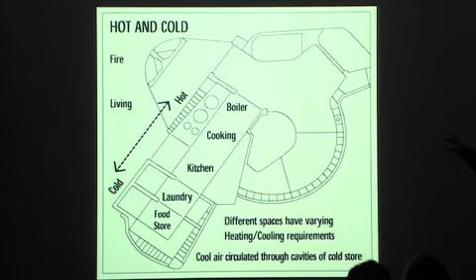Essentially we're having a fireplace - we believe that to be an important thing in the evocation of home. So the fireplace is at the core of it with the heating elements for cooking, and then as you get the colder elements, the food store - an old-fashioned larder, if you like - that's on the periphery. This structure would be a fiberglass diaphragm structure made of ribs, so it has lightness but strength. What you're not seeing here is the loo, the staircase, and the entrance.

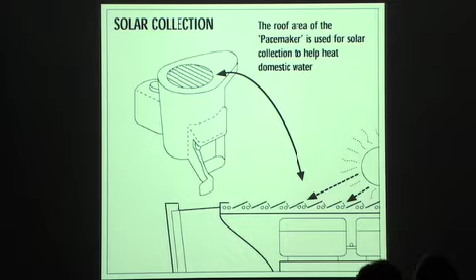This form derives a large area on its roof, which we can use for solar collection to preheat the domestic water supply. This sort of discussion is common parlance now.

This fiberglass element, whilst light and easy to transport, allows us to pour concrete into the wall diaphragms so that it begins to have mass.

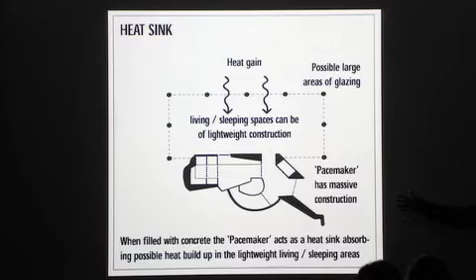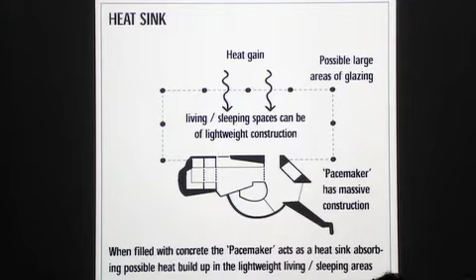The idea is that there are a series of ducts within this so that air can flow around it. If you build living accommodation next to it, the air can pass through so that at night time you close it off and have warm air contained within it. In winter and summer you can open these up, and then draw air through to cool the mass of this at night.

This image shows the relationship between the pacemaker, the clip-on heart, and the lightweight structure adjacent to it, which would have all of the living accommodation. That might be a panelized construction system.

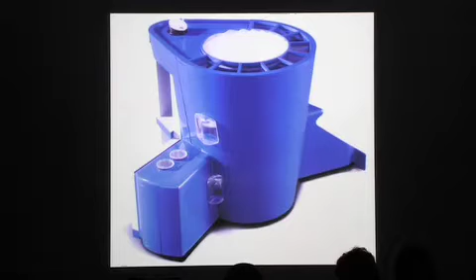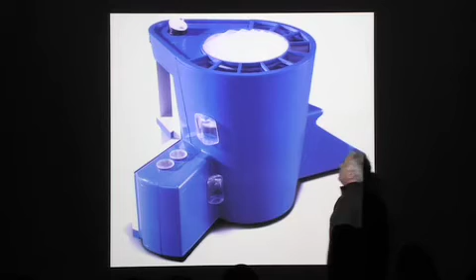So there is the pacemaker. This is the entry point here, and this is the connection to the services. This is the kitchen element here. The second story has got a bathroom within it, and the fireplace element at the back, and a satellite dish on top.

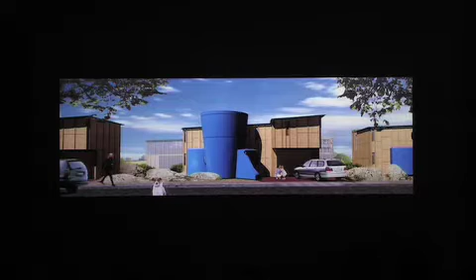So here you see it ready to roll up to site, with the pacemaker on top and the flat panels below. We did a competition called Concept House, and we shamelessly re-employed the pacemaker but designed the flat pack system for the space for the house next to it. So there you see the front elevation, and here the somewhat idealized garden elevation.

The next project I'm showing you is one we did for a Europan competition in Switzerland, in a place called Biasca Pollegio. It sits at the very base of the Alps, at the confluence of two valleys.

A railway tunnel was going to be built to speed up rail traffic from Germany to Italy, boring through that mountain. They were going to need a village created for 800 workers while it was being tunneled. Then the idea was that as the railway line moved south towards Italy, the workers would move with it, and the buildings themselves could move with it.

We were intrigued by that as a project, so we proposed a series of chalets in flat pack construction, but in a way this is the inverse of the pacemaker. Rather than the heart of this chalet building, which would house 20 workers, being a prefabricated element, we were thinking it would be a stone element housing the kitchen and hearth as the communal area for the people living in that hut.

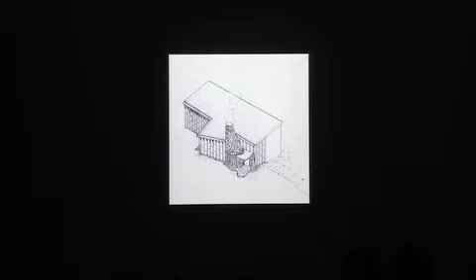We wanted something not transient for that, because these guys are going to be poorly paid, coming from all over Europe, and so we wanted something with a kind of solidity and warmth for these people. But then we thought the chalet itself would be of prefabricated flat pack construction.

So here you see the stone chimney, entrance and kitchen element, and here the flat pack element that makes up the chalet. Here's the decking, this is the communal room. We have two-story shower elements with 4 showers in each, which would be made and craned in.

And here you see the floor plates and the wall slabs, and all of the external wall panels, and then again the prefabricated roof.

Your clicker. Oh, right, you can just go forward. Thank you. Okay, thank you very much. It's radio control. Thank you.

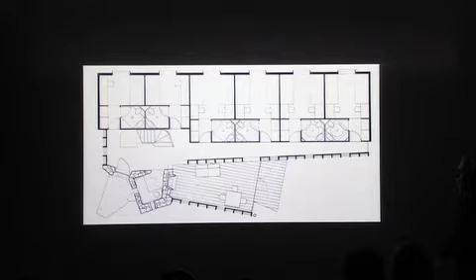And here you see it planned, obviously very, very small. This is the communal room, there's the little kitchen, and here the shower units and the bed spaces.

And here a section where you see the shower element, the prefabricated shower element, and there obviously the stone hearth for the chimney. Here the elevation.

This was our site plan. This is the railway, which is being connected to and enlarged, and these were the prescribed sites.

The idea was that you had to house 200 workers, then 400, then 600, then 800. This was an old empty convent that would provide some of the facilities they required, and this would all be the residences.

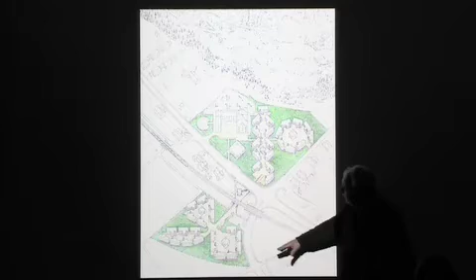So the first 200 are contained here, the next 200 here, and then the next 200 like that, and finally the 800 dwellings. But we gathered them together in clusters so that there would be a communal space for all of the people staying there.

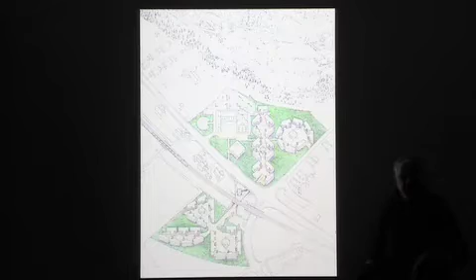This was another community building, that would be a dining hall. But these were kind of smaller community buildings which would have table tennis tables and billiard tables and so on.

So here you see a section through that communal space, and in the communal space, the green, we call these little hamlets, where you can see they're playing boule, and the glorious Alps as a backdrop.

Needless to say, that didn't win the competition.

So now we're going to do a leap forward in time to much more nearer the current day, for a very slow-moving construction for a private house, in fact for myself and my partner, in Highgate in London. We did wonder whether we should call it Sloth House, but we like Stealth House.

And so you have the kind of residue of this little community, this little village, left by all of these stone towers, so that there's some kind of, to use the very popular word that the Conservative Party seemed to love, legacy. There was a legacy of this development.

So I'm sorry I didn't mention that, but I suppose we kind of like the notion that some things can be very, very permanent and some things can be very transient.

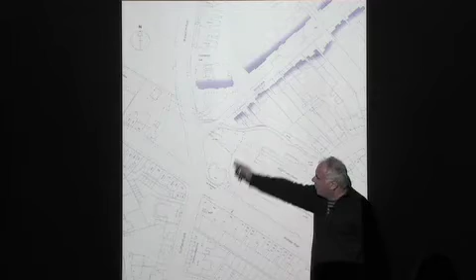So back to Stealth House. Stealth House is located here, and it's importantly near the Woodman pub in Highgate, and it's in Wood Lane.

And Wood Lane is an interesting street. It leads to Queen's Wood, and it has on its south side, which this is the south side, a whole series of very idiosyncratic buildings.

The land not only slopes quite steeply down the hill to this wood, but it also slopes very steeply down in this direction. In fact, it slopes down to the tube, to one of the entrances to the tube station. So you've got a very interesting cross-section on the site.

And we bought this little strip of land between these two buildings and proposed a house there. And because the land, as you see, this is the road here, and the land slopes away quite steeply, it gives us the opportunity to consider a house where we can put the living levels at high level.

So that we're getting the advantage of the fantastic views, or being in the tree canopy. You get the views in winter. In summer, you're in the tree canopy, and that's quite extraordinary. As well as the sunlight.

And bedrooms, of course, don't really need a whole lot of light, and nor do bathrooms, so those we suppress and we sink into the earth.

In looking at the plan form, south is down here, the sun is moving around like this. So we thought of the merits of having a rounded end on the south side, so that as the sun passes around it, it allows light to come smoothly into the neighbours' houses.

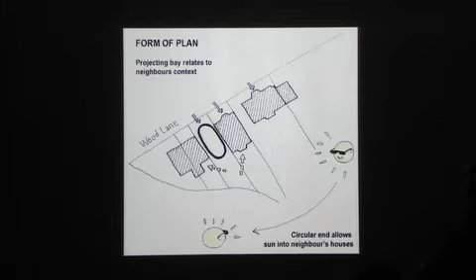On the road side, there are a series of bay windows here, and we make the argument that we're responding to the context by having this house expressed as a bay.

So we've pushed back the facade of our building at that point here, and then we've decided to claw back the space we've lost by pushing out the living space above over the cars.

In thinking about the materiality and form, the lower levels are going to have the bedrooms. Bedrooms quite conveniently can have a rectangular form, because the largest object is about 2 meters by 2 meters, and they're pretty well nearly always square or rectangular. So for that reason, we've got a kind of very orthogonal form to the base. It sits comfortably with the neighbours.

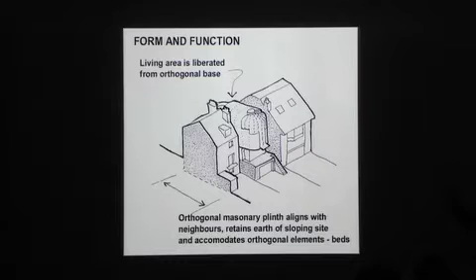In terms of materiality, it's been cut into the hillside, so we want a dense material that will retain the earth. So in this case, we're proposing engineering brick.

But we're saying that the living area up above is liberated from that, it can take its own form. And we're also saying that for economic reasons, one understands why we make this out of brick here—we have to have something dense to hold back the earth.

But above, while we're not holding back the earth, maybe we can then look at a prefabricated construction. So we're proposing that the living area is built entirely off-site and brought in. And in that way, we're arguing that it will create less disturbance for the neighbours and a higher quality of construction.

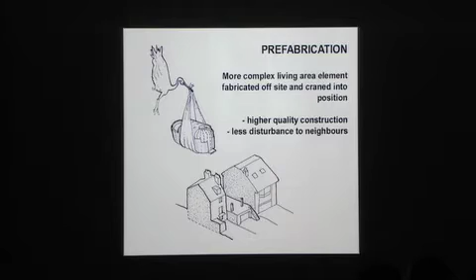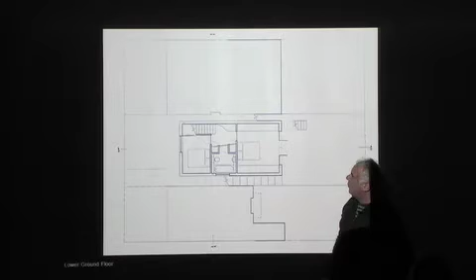This is going down the stairs from the entrance hall, and there's a guest bedroom there and a principal bedroom here, which has access onto the garden.

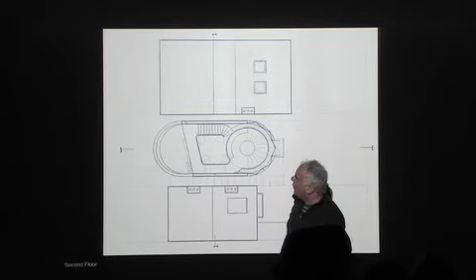And you arrive here, where there's a gallery overlooking this double-height space, and there's an external terrace, and that's located there because it gets the setting sun.

South is down here, so the sun is setting over here, and this gets sunlight from about 3 o'clock.

And then here you go up a ramp to a kind of, I'm calling it an elevated conservatory. It will be a conservatory in the sky, really, which will have planters and seating there.

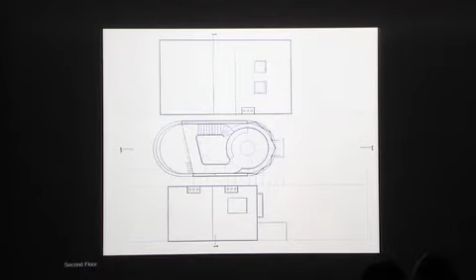And obviously, the house is really seen as a kind of promenade through a series of spaces, and that is the conclusion to this promenade through the house.

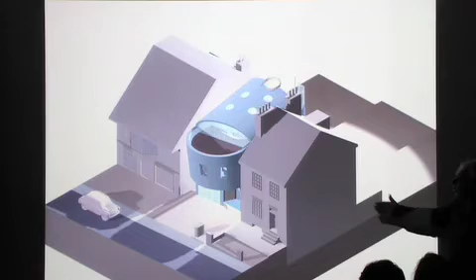So here you see a computer model of it. This wall is cut at an angle here, like this, so that you're getting more of the space available to the sunshine.

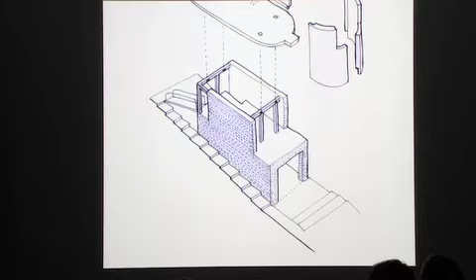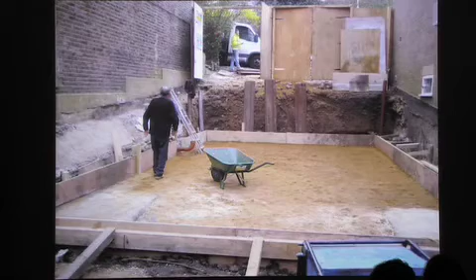And there you see us digging the hole in the ground, and a rough cast slab there, and then sand on top of that, and then I think it's 6 inches of insulation to isolate the building from the cold earth. There we are, pouring the slab.

And then building up the engineering brick off the slab. We're using engineering brick because these are incredibly strong bricks, they're incredibly moisture proof, that's why you see them on a lot of the railway bridges.

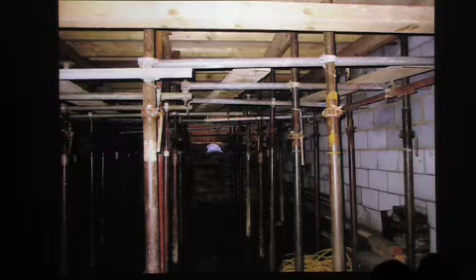And we're doing cavity construction, and where it's below ground, we infill that cavity with cement, so it becomes a rigid wall. And above, when it's above ground level, then we put insulation in that space. When it's below ground, we put the insulation outside, but of course it's covered by the earth.

So this was all the propping for the first floor slab, or the entry-level slab. There, a bit of shuttering on the side. There you see the insulation between the inner course and the outer course.

And as soon as it's above ground, we can then switch to this lightweight concrete block. So there you see it emerging.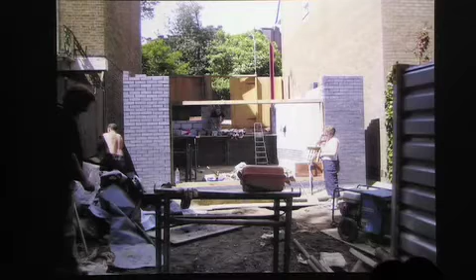There you see the client in one of her happier moments. I don't know, you probably see her scowling a bit later on.

This is the entry hall slab, and this is where the stair will go down.

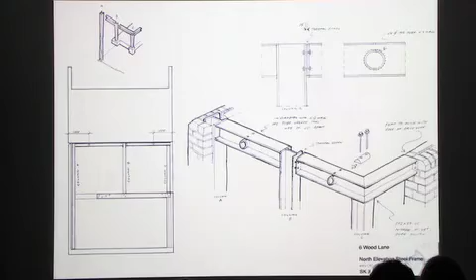And these are sketches of steel trestles. That's the entry hall slab here, and there's steel trestles on top of that going to support the living element that's going to arrive above, and it also braces the walls so that they're stabilized in this fashion. And this is making them, and this is installing them.

And that's on the garden side. So there you go, we're ready for the top element.

What I did was, I went to the pub and I was having a pint and I was introduced to a guy, and now I'm embarrassed because I've forgotten his name. Tony, it will come back to me. He's an amazing guy, and he is a product designer, but he was a product designer for people like Norman Foster about 30 years ago.

And I said, 'Would you be interested in making this top bit?' And he said, 'I might have in my youth, I'm not sure, I'm going to come and have a look, show me the model.' And so I showed him my model, which is not this one here, by the way.

And he said, 'Well, if you're making 200 of these, I could see why you might make it in aluminium, that you might set up all the tooling, but you're only making one of them. So in that case, why don't you just make the one of them?'

He said, 'You've made this model by making ribs and then bending over bits of plastic, why don't you do that with this? And why don't you make it out of timber? Then you can epoxy cover the timber and it will be waterproof.' So we thought that was very, very clever and very helpful. And so we looked at how we might break the top element into components that could be made out of timber.

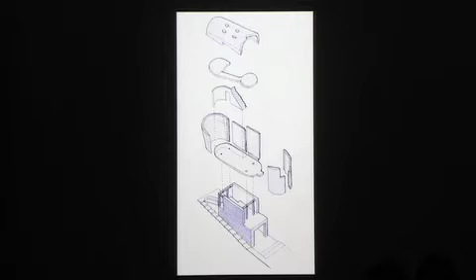And this is a drawing by the people who we got to make it. They're called Cowley Timberwork, and they do absolutely extraordinary work with timber. And here are their drawings of how it might all be panelised.

Essentially it's made around, in old money, a 4-foot by 8-foot sheet of timber, which in metric is a 1200 by 2.4 metre sheet of timber. And so for economic reasons, each of these panels is broken into the sizes of a sheet of timber. And there are 4 ribs to each of those sheets. And all of the curves here are just 2-dimensional curves.

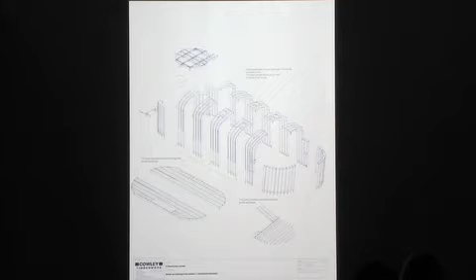I kind of go a bit berserk about the way people love Zaha Hadid, because she doesn't have to operate in any kind of real world at all. And her curves are very, very complex, and that is very expensive to make her projects. So I think it's more interesting to think about how you can still achieve extraordinary things, but do it with an intelligent economic approach.

Unfortunately, I had all of my slides of the construction of this stolen, or rather I had my laptop stolen. They were all on this. So unfortunately, I don't have the best photos of any of this.

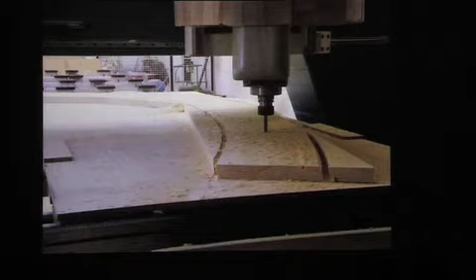But those planks that you saw there then were jointed into what we called hockey sticks. So they had this kind of profile. And there you're seeing a joint in the hockey stick there and a joint there. So those were flat bits that were then jointed.

And then they were cut away by this CNC router. So this is all digitally analysed and then cut by a kind of computerized drill system or cutting system.

And even though I say it's a 2-dimensional curve, it has huge complexity, because when the walls are purely vertical and the plywood then is at a right angle to that, but as it goes over the barrel vault, the angle always changes if you're trying to get the plywood fixing directly onto the timber ribs. So they're exceptionally clever people, and they've worked all this out.

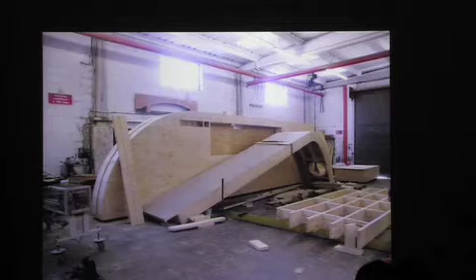There, another detail of the plywood being lapped over and screwed onto the ribs. Here you see one of the lanterns set inside. There you see one of the bay ends, and that will be the terrace up there.

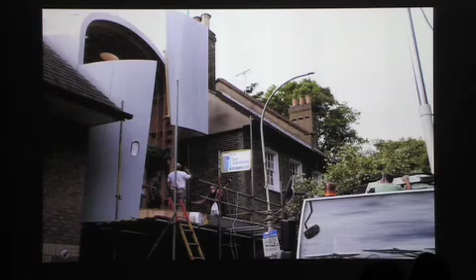And then this is on the roadside, where you see the panels turning over to create the arch, and the quadrant panels coming in to create the bay window area. And this is the terrace deck.

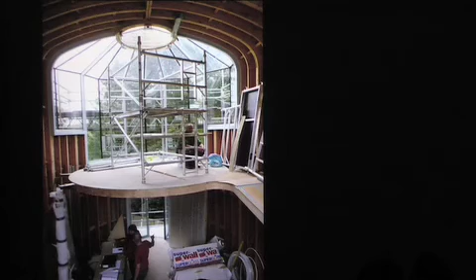So having got glazed, this is a view of the interior. That's that circular disc of space here. And then this is looking back towards the street. All of this was prefabricated, all of this. These stairs came as a prefabricated element. It's all made up in Lincoln, in the north of England.

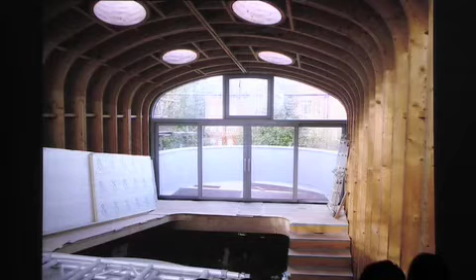And then that is the terrace. Another view—you can see there was a fair bit of water penetration before the glazing was complete. And now beginning to line it out.

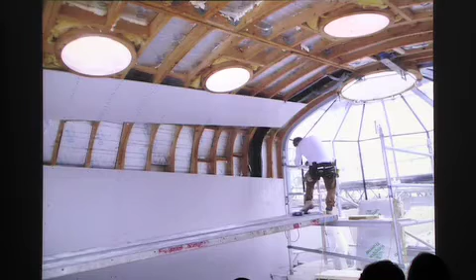Although it kind of looked like quite an interesting structure with all the timber, we just thought it would be more interesting to insulate. We had to insulate between all the ribs, and then line it out with plaster. So here you're seeing it lined out. Those are apertures in which they're going to...

It's bendy plasterboard, yeah, only about 5 mil thick, and so it has this funny sheen on it. It's a different colour.

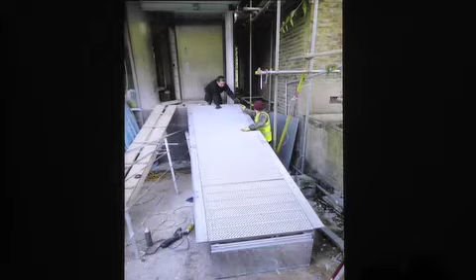And originally we had a ramp going into the entrance, but then we changed it to a bridge. So here you see the bridge coming in.

So now I'm going to take you up relatively to the current day where it's at. It's not a completed building, but that is the footbridge approach, and the doors on the left there.

And when you come in, that's where the wardrobe is. And this is where the letterbox is, so if I go... yeah, so there you see the letterbox there, and it...

And it discharges into here. You can see we also keep our nuclear waste there.

So that's the wardrobe there, and then you get a door here which goes through to the office. And this is the office with a slate floor that will shortly carry on all the way out to the end of the terrace.

And then this is the stair down to the bedroom level. And there you're seeing the guest bedroom. So you can see this is the ground outside, it's at a higher level.

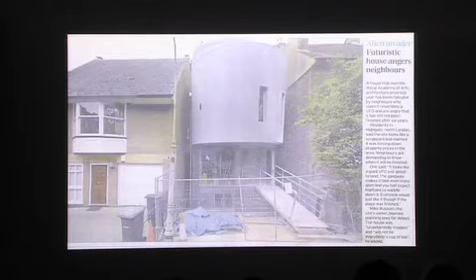So I'm now going to talk about Downley House. And this is the last project.

Downley House sits in a little dale in the South Downs, and it is actually quite beautiful. Although when we went there the first day, Andrew and I couldn't believe that anybody would want to live there.

Oh, now that's interesting. Well, it's not interesting, it's not very helpful at all. This is a page where this must be a blip with this USB stick, because the image is gone, you're only seeing bits of it. Is there any way we can get these images back, do you think? Or could I switch to my laptop? Would that be all right? Sorry about this, guys, I'm going to get my laptop out, because these are quite important sketches. I'll carry on talking while I'm doing this.

I've got a white cable, which hopefully will do something. No, that's HDMI, that's all I've got. If you can continue your slides, I can bring a VGA adapter. Is it worth 5 minutes? I can just grab an adapter. Mac adapter. Then we're back to the laptop. Sorry, yeah, can we get this? I can bring that up. No, it's not a problem. Yeah, can we do that? Because I just... Yeah, I got it, but downstairs the big one. Give me 5 minutes.

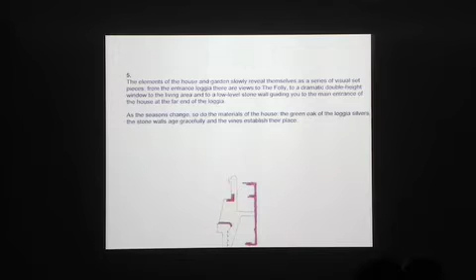Couple of minutes, his office is downstairs. It's... could be what? I don't know. It's weird, isn't it? There you are, you can see that's the image that I want there. The trouble is, it's actually quite important to the description. It's this image here.

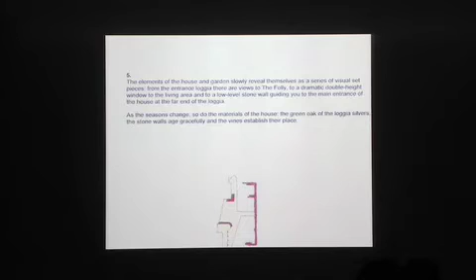Yeah, you're missing like most of it. This is the story, this is how we, why we do what we're doing. Then why would that do that on the... I've had this kind of thing before, I don't know. I'm sorry about this. It's alright, it'll be better. I can't even really blag it. Well, I could blag it, but it'd talk about the bit that's below.

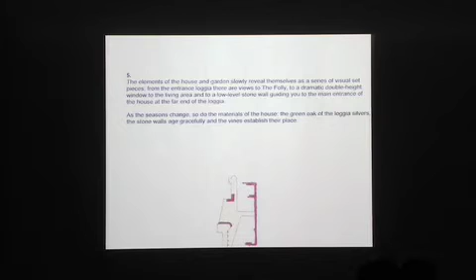Yeah, actually what I'll do is use this. I'm sorry, guys, while we're getting this sorted out, because I have got the images I want on my laptop, but I can use this image to talk about the brief the client had.

They're a young couple, I'd say mid-30s. He's obviously made a fair bit of money, and his wife is American, and she's an illustrator. They met when he was in New York and worked in a wine shop, and she worked in that wine shop - that's how they met. He's really into wine, serious wine, drinking it and trading in it. But he actually made his money doing what are called PFI, Private Finance Initiative - student hostels, hospitals and things.

He wanted to move out of London. He found this bit of land that he thought was very beautiful. And his brief was very contradictory. He would say: I love my children, they're wonderful, I like to supervise them, I want to be away from them. My wife has a wonderful family, I love it when they come over, we have a wonderful time together, I want to be apart from them. So he set up, in a way, a lot of things he wanted as contradictions. And then they did drawings where they would say, we don't want that, we want that. We don't want this, we want this. So it was a kind of very rich and poetic brief.

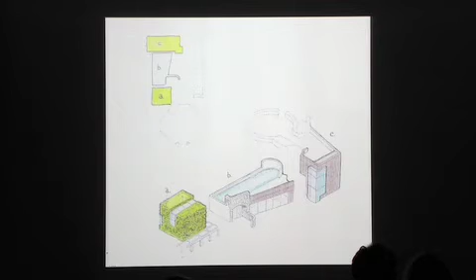How are we doing? Do we think we're... Laptop. Yeah, that's it, thank you very much. That's the image I want. Is there a reason why it's sunk? Are you going to full view? Full view. No. Okay, yeah, okay, can I use the clicky or do I have to use this? I don't know if that works on Mac.

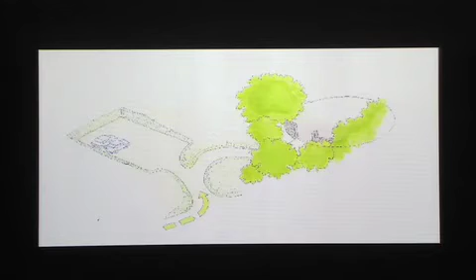So this was the notion of arrival. Edwin Lutyens' work is very much to do with how you arrive somewhere, and then how you experience beyond - it becomes a promenade through the house and into the great estate.

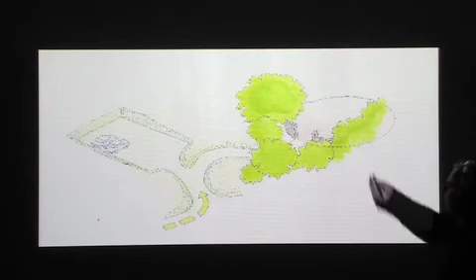This is the location where the site huts were for the guy who died. We're accepting that and keeping it, saying that's guest parking. But then we introduce this looping drive that arrives in a stone forecourt. This is the point where you leave the countryside and leave the world of the car behind. The owner's cars are set into a garage through this wall, but it's buried under the hillside, and that becomes a loggia element that takes you towards the house.

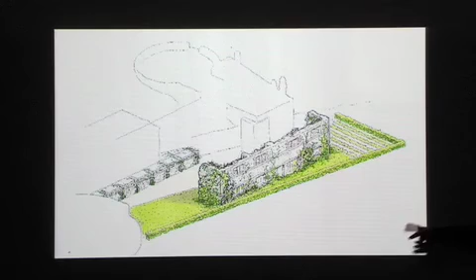It takes you into another courtyard, framed by this ruined wall. That ruined wall works as a romantic folly, but it also screens the new house from the neighbouring houses, making it a very private place, while also affording the neighbours privacy as well. Here you see the ruined wall from the other side - we're proposing to just plant it, and it had a cellar area that we proposed would have pools for carp in it.

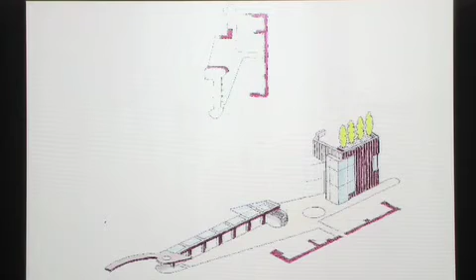Then I spoke about the three elements of the house. This was the loggia, and on axis with it we have something that begins to reflect the living element of the house - the living room might be here beyond, but you don't go directly there. You sweep into the house at this point here, and that is the point of entry.

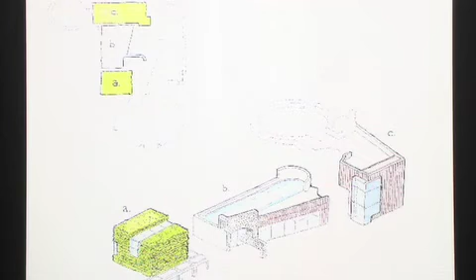That is the wing for the guests and his office, and this is the family wing here, with the living area and swimming pool above. So there you see the swimming pool, but the swimming pool begins to signal the route through the house into the landscape because it's set into a hillside.

This would be a kind of barbecue terrace here with the views to the valley that he really enjoys. Because he's bought this large piece of land, we wanted to extend across a wildflower meadow to the very end of the site, and there we proposed a tree house for the children.

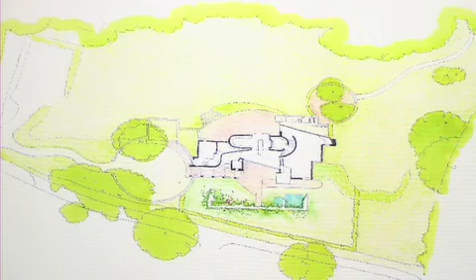So those were the drawings with which we got the gig. And these were the next series. We didn't plan it at all - we didn't say this is where the bathrooms are, this is where the bedrooms are. We didn't do anything. So they came back and said, well, we're very interested, but can you just show us where the bedrooms are and where the entrance is and stuff like that. So this was a very quick drawing to show the layout.

And this was a very quick development in three-dimensional terms, where you see the wing here and the open-air swimming pool.

We carried on developing this for a few months, and we got to the stage where they started getting worried about having a swimming pool, an open-air swimming pool, which would ice up in the winter and leaves would fall in it. So we thought about enclosing the swimming pool, but we were very drawn to the idea of it being an open-air swimming pool. So we had this kind of concertina glass roof that would go over it.

And then we got into the design of that a bit more, and then they began to realize that we were sinking a lot of money into this, and they began to feel that it was a bit like having a child, or a pet, that they could never go on holiday because they'd always be worrying about this swimming pool. And so they said, regrettably, as much as they loved the swimming pool, as much as it helped us get the gig, that they would have to dispense with the swimming pool.

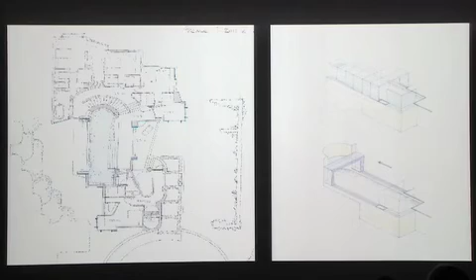And so we had to think about what we could do without a swimming pool. And I'd like to thank Will for the wine tonight.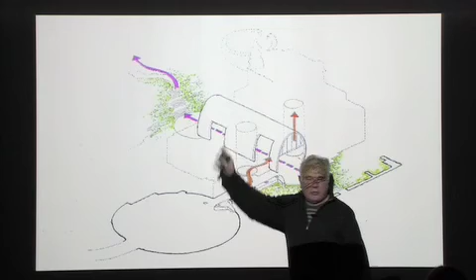And because of their passion for wine, we adopted this as the unifying element in the house. So instead of having a swimming pool, we introduced a great big wine barrel as the heart of the house, connecting from the entrance of the old house all the way through the house up into the landscape. On each side of this wine barrel, we then have two more cylinders, one of which is the route that takes you up to the upper terrace, from which you also get access into the garden.

So this was a developed plan showing that there's this space that carves all the way through the house, from the old entry point, and carries on up into the landscape.

This was the living room, this was their cinema room, that's the kids' playroom, that's the wine cellar, that's the kitchen. There's the garage set into the hillside, here the loggia, the entry point here. At this level, that's a kind of boot room, there's a kind of service entrance there, boot room and utility rooms, and that's the kitchen.

So luckily, they stuck with us and went for the wine barrel. So here you see a development of it, the wine barrel, the loggia, the route up to the very roof of the house, where you get that stunning view.

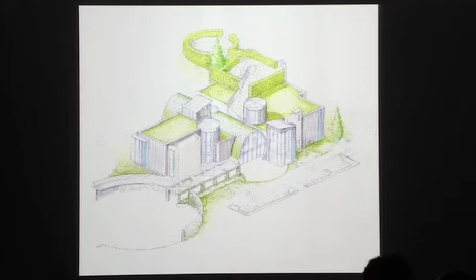And these were the planning drawings. I didn't really go into the planning scenario on Wood Lane, which was on Stealth House, but here we had a much easier planning route, though it wasn't without a level of interest for us.

As I say, we were attached to this competition, and what we did with our scheme was we said, well, we'll keep the ruin, but we won't build off the ruin. We'll use it as a screen for the new house and create this inner courtyard. I think the other architects either built off the ruin or knocked it down entirely and probably put a white sugar cube in the middle of the green field.

What was funny, when we were in the planning process on this, we had to go before the South Downs Design Review Committee, and the planners asked for their advice on this design. They said they could not understand the scheme at all, and in their view, you should either build off the ruin or knock it down and build a new house.

And what was interesting was that I spend most of my time moaning about planners, saying that they're just all peasants. But in this instance, the planning officer rejected the advice of the Design Review Committee and of the South Downs, and they gave planning consent for this.

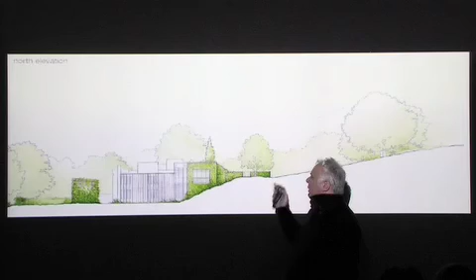So here, this is where it's cut into the hillside. Here you see the family wing with the sitting area here, the cinema room here, the kids' bedrooms, and then this is the master bedroom suite. And that's the roof terrace there where you get the view, and here stairs down back into the landscape.

So perhaps back to the technical issues, which are the real responsibility of this lecture. How is this house made?

What you're seeing there is a block of CLT, cross-laminated timber, conceived I think in Austria, where they have a huge surplus of wood and didn't know what to do with it. Some bright person said, why don't we turn it into giant plywood sheets? So it became a store of building material. These samples are about an inch thick, 25 millimeters, and this one is about 5 inches thick, 125 millimeters. But it might come in a panel that's 6 meters long and 3 meters high.

We thought this would be a very good way to build this building quickly. I should say the client built it himself—not physically, but he managed the construction. He took a year and a half off work to manage the construction of this building on site.

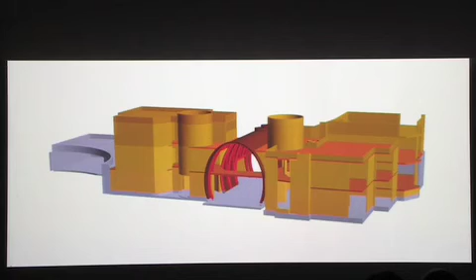They undertook to deliver the wood, which would be cut in Austria, shipped to Switzerland, and fabricated into these panels there. It would be delivered in 3 elements over a 6-week span. There were quite a lot of lorries, but they came every 2 weeks—delivering for this section, then that section, then this one.

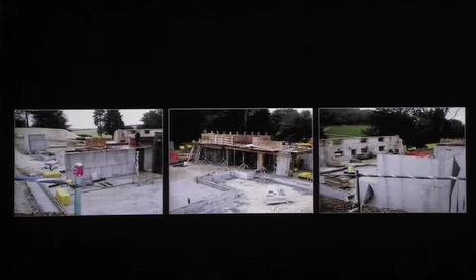I mentioned that the site was chalk. The first thing the client did was raise the site entirely. Here you can see where it's cut into the hillside, and they've built these concrete retaining walls. They're using concrete anyway for the floor slab, so they just turned it up the side to retain against the earth in these locations, and there, where the underground garage will be.

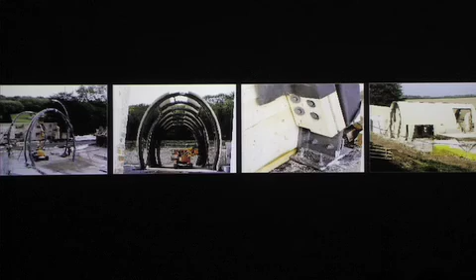This is the arrival of the foudre, the barrel vaulted space. You can see it arriving as these ribs here, which have a kind of knuckle joint up there, confirming it's on the axis of the old ruin. This is a joint where it meets the ground—they're just bolted together like Meccano.

This is effectively the dining hall of the house. I could probably get Wood Lane inside it—not in height terms, but certainly in width I could fit a good portion, maybe the upper element of Wood Lane, inside that. It's that big. Most people would be happy to live in a house out of that. I would be.

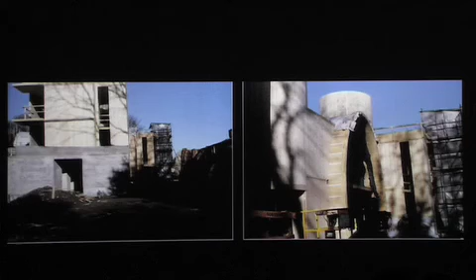This is the guest wing here with the service entrance. Beyond that is where the sitting room is. And here you see the foudre, the barrel, with the cylindrical towers on either side.

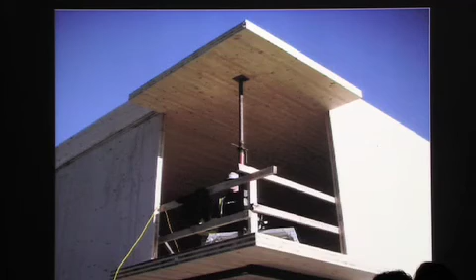And here you see the CLT construction—it really is like a pack of cards. It's just walls and then floor banged on top. It's very crude, in fact. These are just 140 millimeters thick, and the walls are only 90 millimeters thick.

And I mentioned the crudeness—here you see the floor plate coming through, just whacked on top of the walls. This is where the stair is; we made the stairs out of this stuff as well. It's just metal angles and screws—actually very, very crude. It's not a beautiful wooden structure at all.

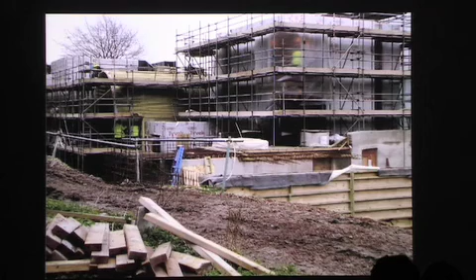So there's progress, and the house is rearing up. This is what you have, seen from the hillside opposite—you're seeing a couple of the existing buildings, the ruined wall, and the new whatever it is beyond. It's hard to believe it's a house, really.

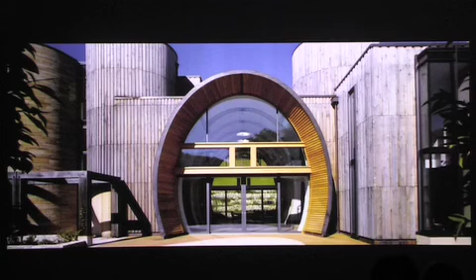So here the land's hollowed out. That's now their barbecue area, and this opens up entirely—all these glass doors slide into the building alongside.